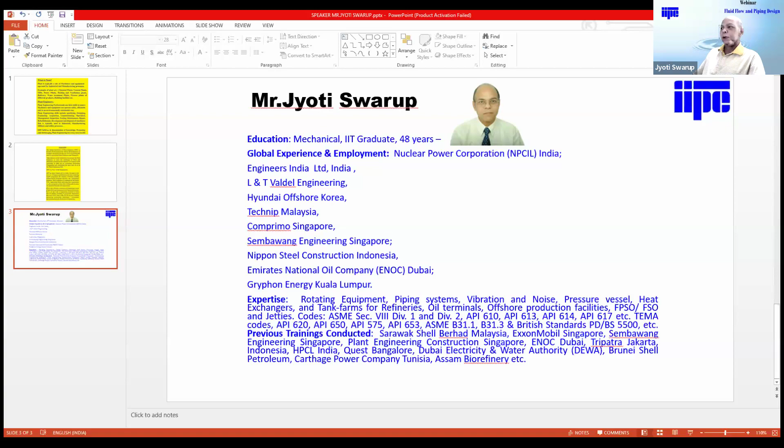Thank you so much for the introduction. I have been conducting trainings from the time when there were no computer projectors. I was conducting training 40 years back, when there were only overhead slides, and we used to write on the slides and project it using a projector. This training on piping design, it's almost 30 years that I have been doing various trainings in various forums. I thank IIPE for inviting me for this presentation.

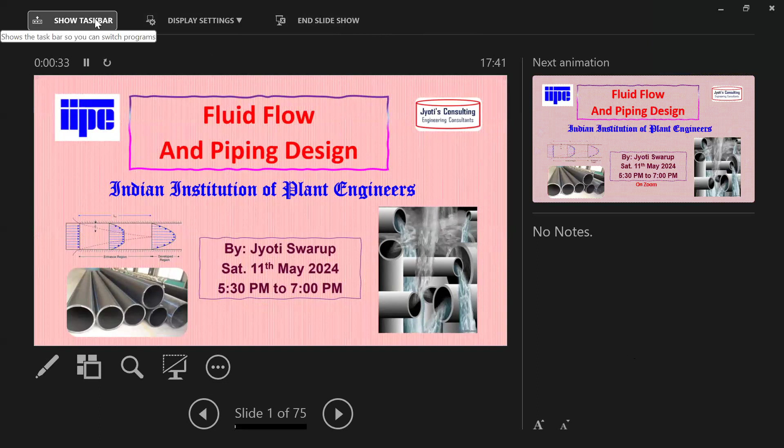Now, let me just share my PPT. Give me just one minute here. Is it visible now? You have to make it full screen, sir. Oh yes, one minute, I'll do it. Is it correct one? You are seeing single screen, right? Yes, screen is okay, but you have to make it full screen. Oh, I made it full screen, that's what I'm trying to say. You don't see it full screen? You are seeing one or two screens? Two screens we are seeing. Okay, I have to change it. Give me a minute, I understand, I have to just change.

I am Jyoti Swarup, and we are going to talk about fluid flow piping design today.

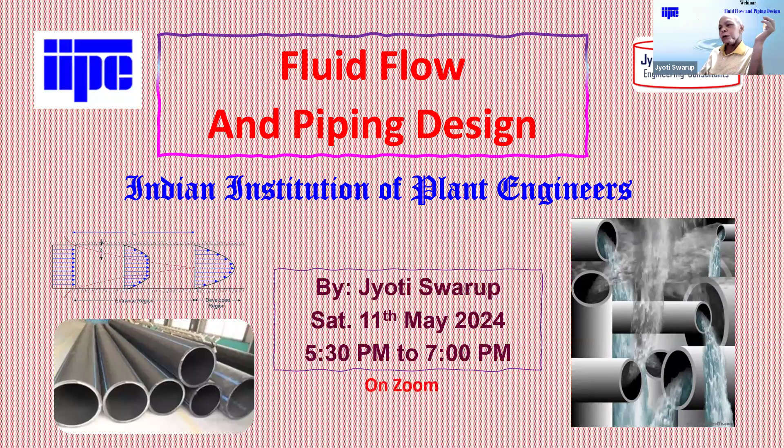To talk about fluid flow: we all know fluid flowing from rivers, from canals, and of course in refineries, in petrochemicals, in water supplies. So the objective of this whole presentation is to calculate and select appropriate pipe diameter and thickness, connection to equipment based on codes such as B31.3 or B31.1.

I have also given a reference if some of you don't have these codes, on how you can download from the net. Piping materials to be selected to determine the pump discharge pressure for sizing the pump, which means calculating the line pressure drop. In piping layout, what is suggested pipe support spacing and how to calculate it, and a simplified flexibility analysis, which means the effect of thermal expansion on pipes as per the codes.

This is how a typical diagram will look like. You have a water source maybe below the ground, then you have a pump, a prime mover, and a water lifting device which is pumping it say one kilometer away to a building or to a storage tank 25 meters high. So we need to find out the pipe material, size, capacity, layout, and how we do all that. This is the objective of this presentation for today.

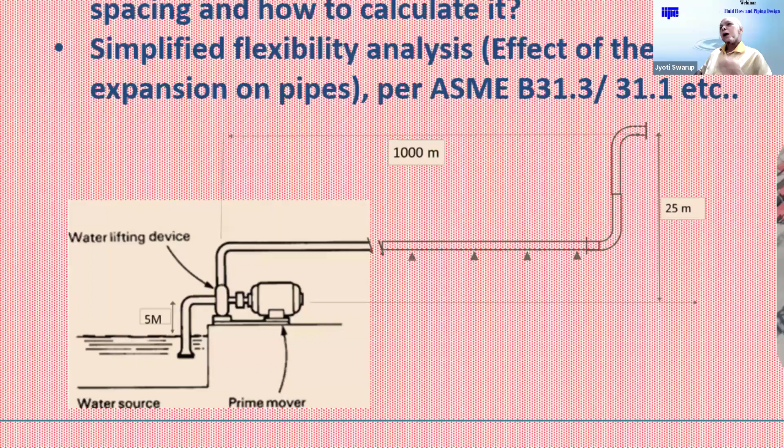We will talk about piping. We all have seen piping in our life: water supply from waterworks to our home, drain piping from home, irrigation pipes in farms, cooling water in buildings, firewater piping, and pipes used to carry pressurized heating fluids, steam engines, etc. In a process plant, the process piping system accounts for a significant portion of plant cost, as high as 20 to 25%. So piping is a very important component of a process plant and needs to be understood and sized most economically. The most important item of engineering is optimization, that is, you can't select it over what is required or under what is required. So the most optimum size and details of a piping system, from a water tank to a building, or a process plant to an equipment, this is the objective of this presentation for today.

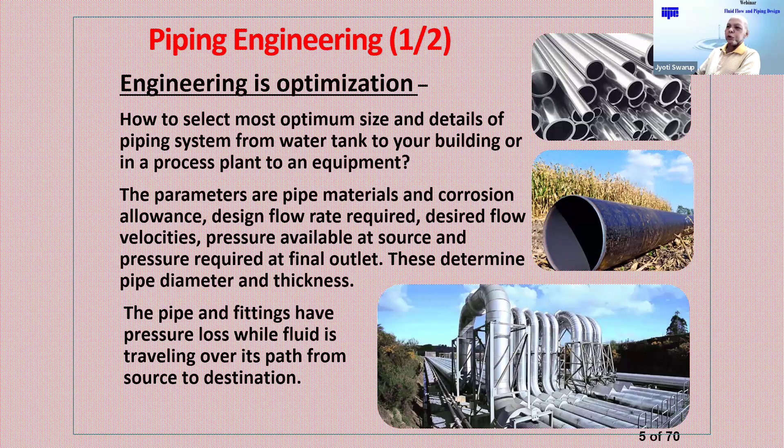So parameters are pipe materials and corrosion allowance, design flow rate required, desired flow velocities, pressure available at source and pressure required at final outlet. They determine pipe diameter and thicknesses. And pipe fittings have pressure losses wherein fluid is traveling over its path from source to destination.

The responsibility of a piping engineer includes design and layout, piping flexibility analysis and support system design, pipe rupture restraints and jet shield design, more applicable to process plants, piping around equipment, producing piping bill of material, isometrics, etc., and coordination of piping fabrication contract and interface with other disciplines. So this is the scope of the piping engineer.

What are the sizes available? Of course, most of you will know the sizes available in the market. But just to summarize, there are standardized pipe dimensions defined by OD and thickness or by schedules. They are available in the market. You can only install a pipe that is available in the market. You are not going to order a tailor-made pipe unless you have 1,000 kilometers of pipe to be installed. So nobody will make it for you.

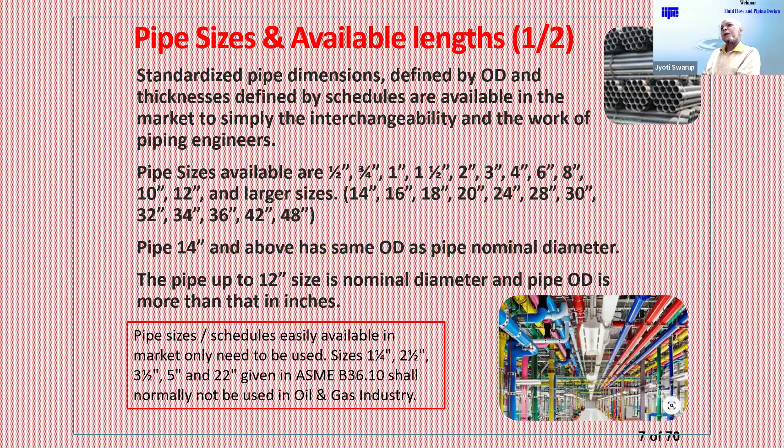For plants, you have standard sizes available, from half inch to 12 inch, defined based on the nominal size, where the OD is more than the nominal size. Larger sizes, 14 inch to 48 inch or 60 inch, are defined by the OD itself. So there are two ways of defining the pipes: up to 12 inches is one method, more than 12 inches is another method. These are supplied in random lengths of 17 to 25 feet or double random length of 38 to 48 feet.

Nominal pipe size is a dimensionless designation of pipe sizes. Diameter nominal is in metric units. So NPS is in FPS units, DN in metric units. NPS 2 inch OD is 2.375 inches, not 2 inches OD. DN50 is the same as NPS 2 inch.

Joining methods include butt welding, socket welding, screwed, bolted flange, quick coupling, etc. So if you see this piping, in smaller sizes it's a nominal pipe diameter and OD is more than NPS. 14 inch and above is NPS, and the OD is the same. So these definitions have to be understood correctly.

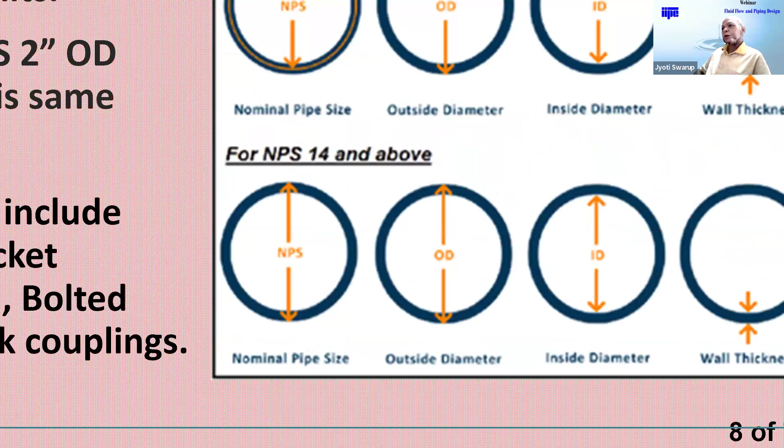What are the thicknesses available in the market? Now there are three different methods of defining the thicknesses. Schedule 10, 20, 30, 40, 50, etc. - this is called ANSI schedule numbers, which defines thicknesses. Also for stainless steel: 5S, 10S, 20S, 40S, and 80S. Similarly, the other definition is ASTM or ASME standard, extra strong or double extra strong. The third method is API 5L, which defines thicknesses. So these are the different methods of defining pipe thicknesses available in the market.

The pipes can be seamless, from piercing solid billets with no welding, or welded type from plate - roll the plate and weld it, either straight seam or spiral welded. Pipe ends are either plain end, beveled ends, or threaded and coupled. Now, pipe thicknesses usually have a mill tolerance allowed as per code.

For carbon steel pipes, it is typically plus minus 12.5%. So if you say a pipe is half inch thick, it does not mean it is exactly half inch thick. It can be half inch plus or minus 12.5%, because of manufacturing tolerances. So some pipe schedules like Schedule 100 may not be easily available, so you need to use the next higher schedule wherever there is a requirement.

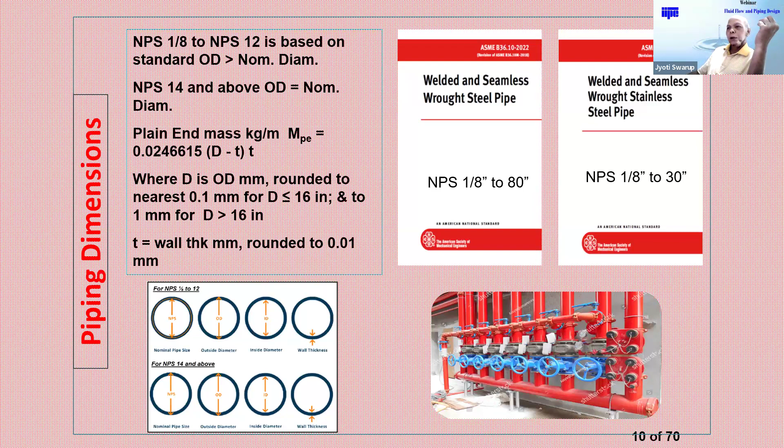And weights can be calculated based on the formula given here in this slide. It's just calculating the section area multiplied by the density, which gives you the weight per unit meter.

Now, these kinds of tables are available in the codes, which give you the pipe schedule, thicknesses, and other parameters that can also be calculated. For example, in Shell DEP or any piping codes, you will find not only the diameter and thickness schedule number, but also inside diameter, outside diameter, metal area, outside area, etc.

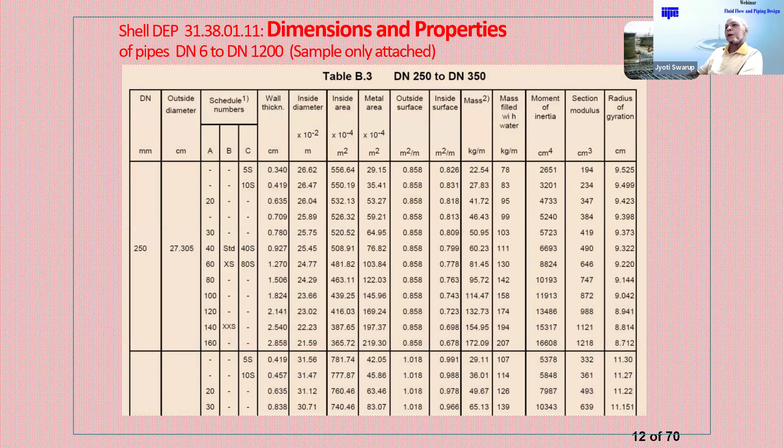So a lot of these parameters can be utilized when we need to use them, and we can use those parameters to define many things like inside surface, mass filled with water, moment of inertia, section modulus, radius of gyration, etc. So now properties can be seen from the table or can be calculated from the formula.

Now pipe connections are using flanges. Typically, if there is a removable connection, it's a flange. If it is welding, then it's not a removable connection.

Flange ratings are defined as 150 pound, 300, 600, 900, 1500, and 2500, based on increasing pressure. For a typical carbon steel material, 150 pound rating is actually 285 psi design pressure, not 150 psi. Many people think a 150 pound flange means 150 psi, which is not correct. The 2500 pound flange rating is 6170 psi design pressure at ambient temperature.

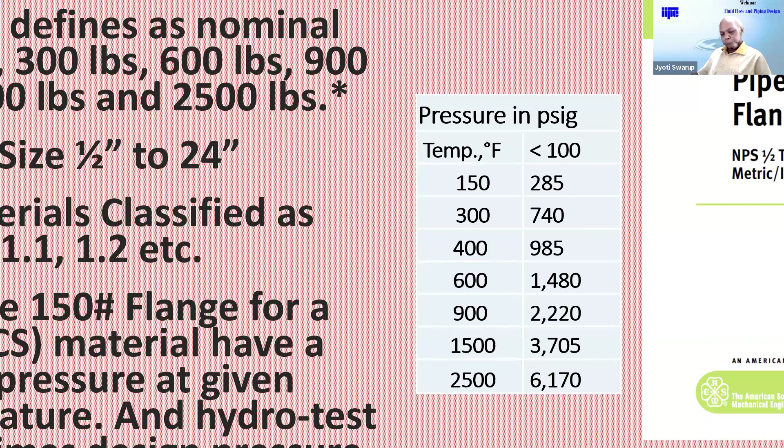This is defined by a code called ASME B16.5. The dimensions, size, and ratings are defined in this code, and it is always required by the piping engineer to define flange characteristics and buy flanges according to the codes. Materials have been classified in this code as 1.1, 1.2, and so on. Carbon steel is 1.1, and for a given carbon steel material, the design pressure at a given temperature and hydro test is 1.5 times design pressure. This information is to be referenced from code 16.5 for the flanges.

Similar information is also available in the valve code, B16.34. It also has another class called 4500, which is not a flange rating but is only applicable for valves. Many people confuse this, thinking there is a flange rating of 4500 pound also, but that is not the case. That is for welded pipes.

A lot of such information could be more useful if you actually try the exercises shared in the email. Now, larger flanges are defined by different categories and codes.

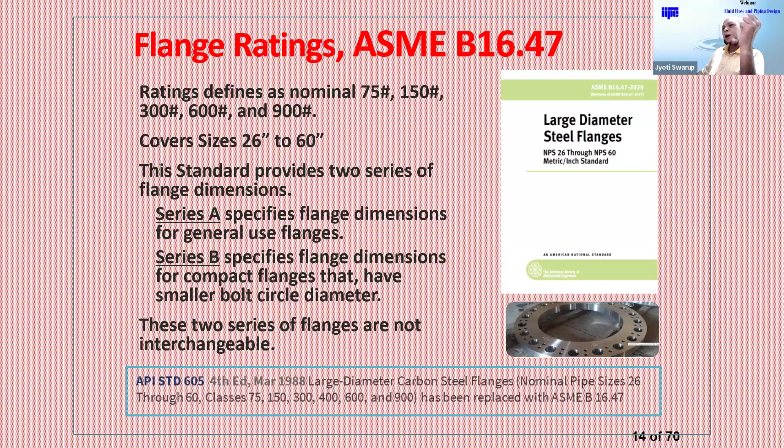Fittings are definitely required to route the piping because it's never straight. Piping can bend, going up, down, left, right, and therefore all kinds of fittings are available in the market - bends, tees, couplings, reducers, and so on and so forth.

All these fittings' dimensions and details are also available in various codes and also on some apps available on mobile. We will give you some description of these apps as we go along.

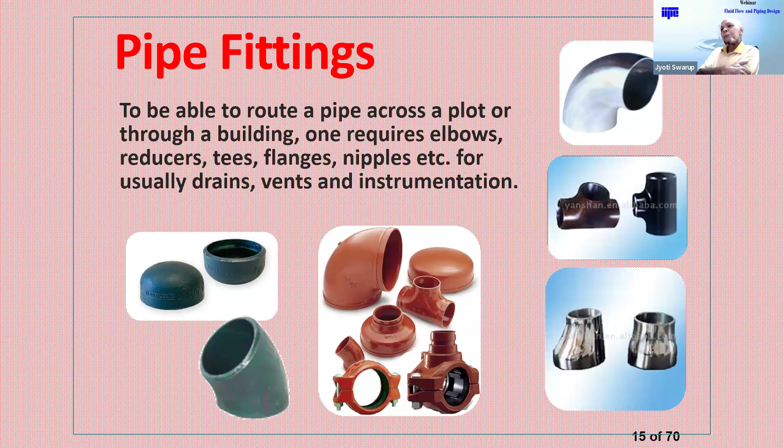Pipe flanges can be defined as various types - welding neck type, as shown in this figure. There is a slip-on type, where you just slip it onto the pipe and weld it. There is a blind flange, which is a closure. There is a socket welded flange at the end of the pipe, a threaded flange, and a lap joint flange. So different types of flanges are available.

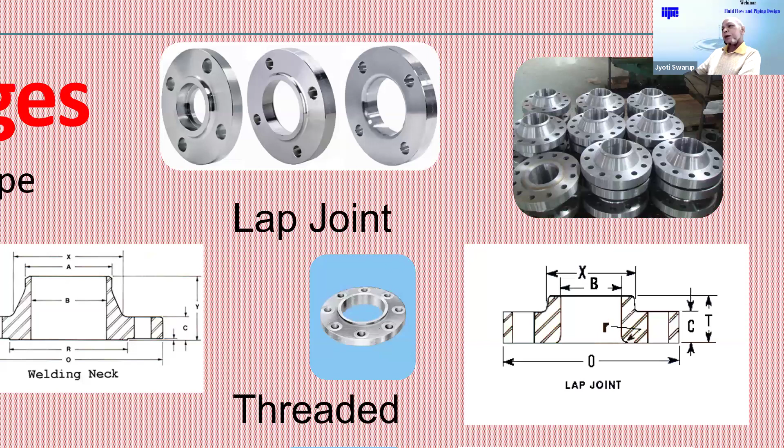For oil and gas industries, most of the time we use weld neck flange, which is the sturdiest design of these flanges. But any of these can be used depending on the application. For example, in water applications, mostly we use lap jointed flanges.

Material selection depends on type of service, compatibility with other materials, mechanical strength, ductility, elasticity, toughness, need for special inspections, test or quality control, possible misapplication in the field, and corrosion and erosion caused by internal fluids or marine environment.

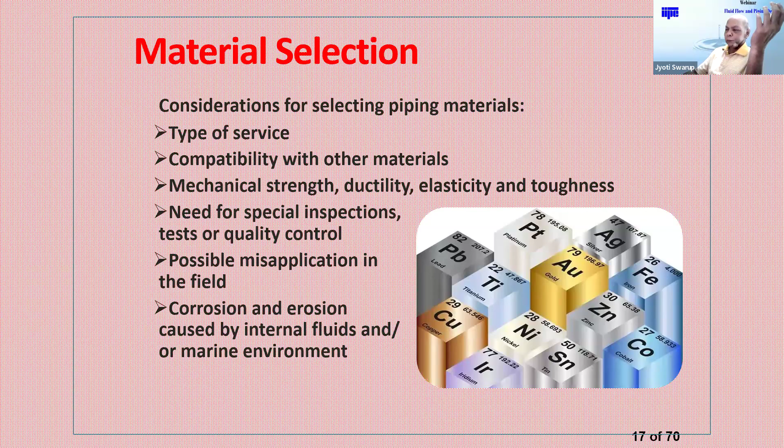There are various types of material that we can select, and some material codes available in the American codes are A53 for pipe, A106 for seamless pipes, and so on. For fittings and flanges, etc., there are a lot of materials available in the ASTM or ASME codes, and some of these are only listed here.

For pipes, we already discussed ASME B36.10 for carbon steel pipe and B36.19 for stainless steel pipe. API 5L is another code for line pipes - pipelines such as cross-country pipelines or long pipelines, wherein API 5L code is used for pipelines with a given thickness.

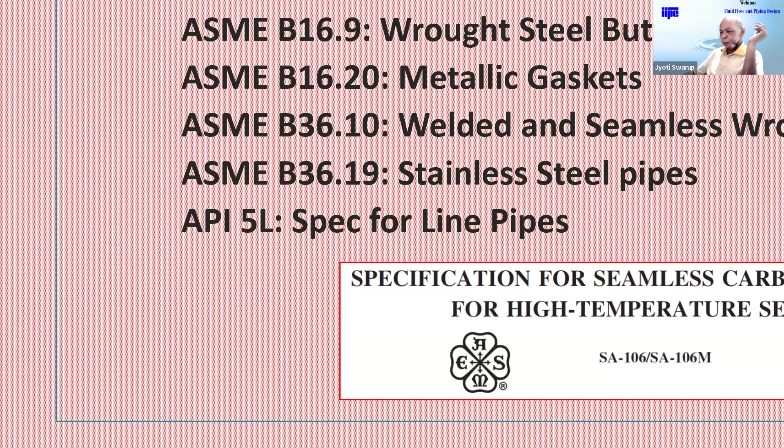The common material grades available and their minimum yield strength and tensile strength are given in the table below. As you can see here, API 5L grade A has yield strength 30,000 psi, ultimate tensile strength 48,000 psi, and so on. So 5L grade B is 35,000.

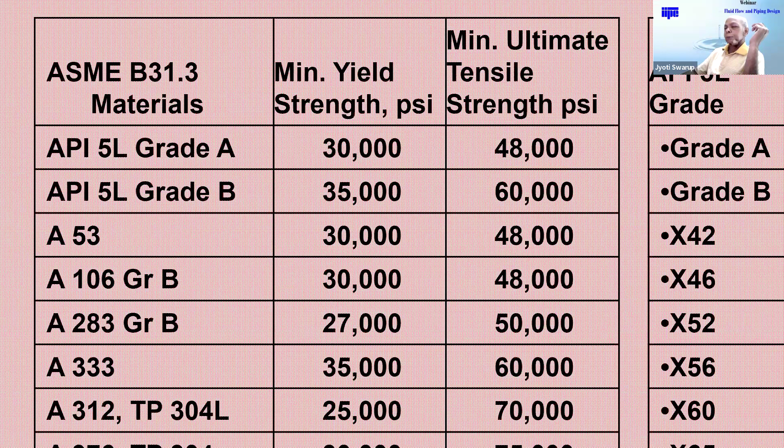Now why am I listing this information here? Because this will tell you the strengths of the pipe when you want to calculate pipe thicknesses. This information will be required for us. Things like duplex stainless steel 31803, etc., are always available with high yield strength and tensile strength, and can be used to reduce the thickness of the pipe if there is a critical application.

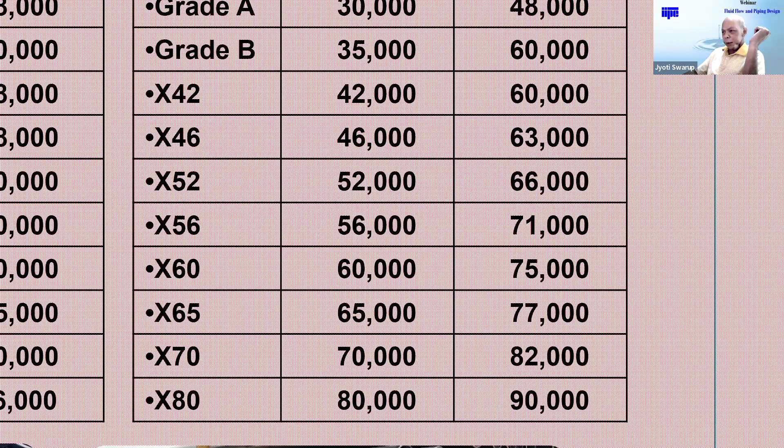The other code we mentioned was API 5L, which gives the thicknesses, and it does not give it directly—it says X42 grade means 42,000 is the yield strength of the material. So we have X80 grade, which has a yield strength of 80,000 psi for the carbon. These are all carbon steel pipes, not stainless steel.

So for pipelines or critical applications, we use API grade 60 or grade 65 instead of using a piping grade, which is API 5L grade B or A106. So for pipelines we always use API 5L pipes, while for piping we use ASME A106 or whatever pipe grade we have. Pipelines can be high strength material ordered to the spec of the client, and of course ordered in bulk sizes. This actual grade may not be available in the market.

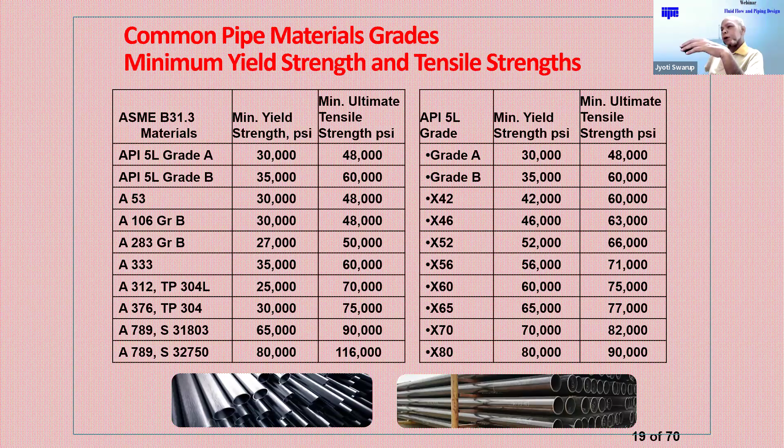Now, stainless steel is used in many critical applications like pharmaceutical or chemical applications wherein we use 18-8 quality, used in the chemical industry to manufacture equipment for processes. 316L is used in cases where metal is deformed or subjected to thermal loads over extended periods, where there is heating to a temperature between 500 and 900 degrees centigrade.

So different criteria exist for material selection, and each material is selected accordingly. Coming back to what we said, engineering is optimization. We cannot select a material which is more expensive than required, because the plant will become unviable. So it is always good to select the most optimum material, and we will select stainless steel only if it is really required, not just because I feel like selecting stainless steel or duplex stainless steel.

The choice is always to go with carbon steel welded pipe, number one. Second is carbon steel seamless pipe, number two. Then comes any other material like copper, brass, bronze, or whatever we have—stainless steel, duplex stainless steel, or nickel. But the cost keeps increasing with these materials, and we should only select them if it is really required for the project.

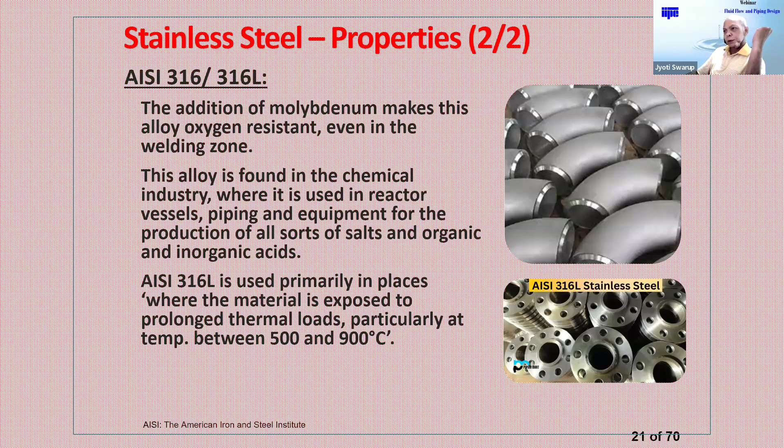So there are different criteria for material selection, but as I said, it is always the lowest cost material which needs to be selected to optimize the project cost, and not select a size or material which is more or less than required.

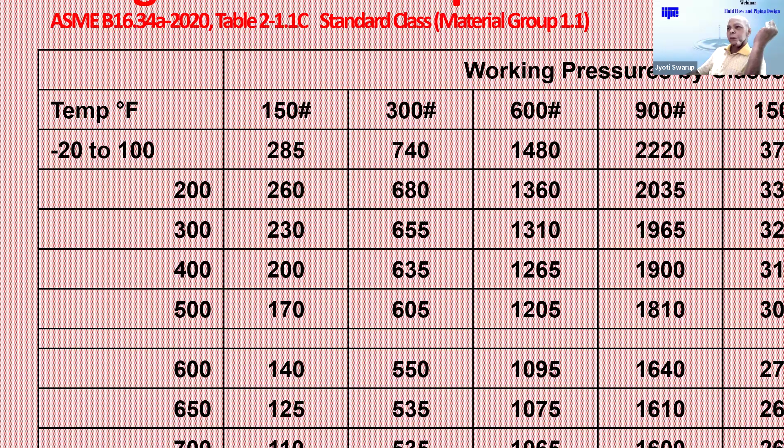Now this is a typical table from ASME B16.5. I've just copied one of the tables, number 2-1.1C, which is the same as in B16.34 and B16.5. So for 150 pound line rating, temperature minus 20 to 100 degrees F, the working pressure is 285 psi; 300 pounds is 740 psi; 600 pounds is 1480; 900 pounds, and so on. As I said, 4500 is not for plant, the rest is for plant, copied from B16.5.

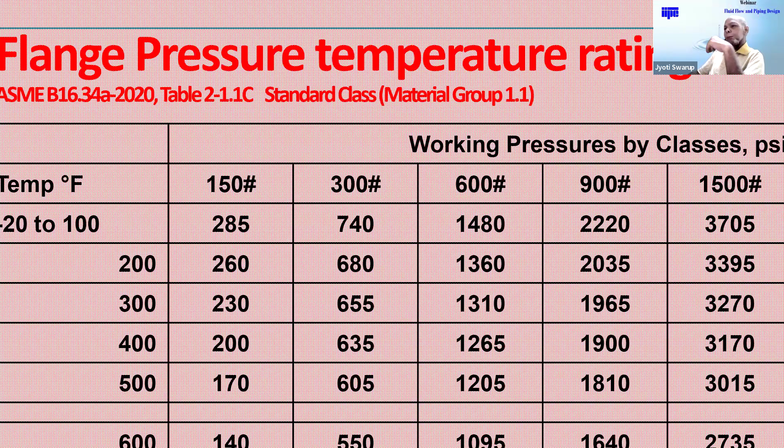So these are the pressure ratings for a given temperature of these flange ratings, and that is why, depending on the design pressure of the piping system, you select an appropriate flange for the next higher pressure rating to which the piping system is designed. This code, B16.5 or B16.34, is important for selecting the flange at the appropriate rating and size, and depending on the design temperature you are designing the whole system for, you have to select the appropriate flange for the maximum pressure rating, higher than that to which your system is designed.

Any of these apps can be easily downloaded. There are both free versions and paid versions. Free versions are good enough, with a little bit of ads which come, which you have to tolerate.

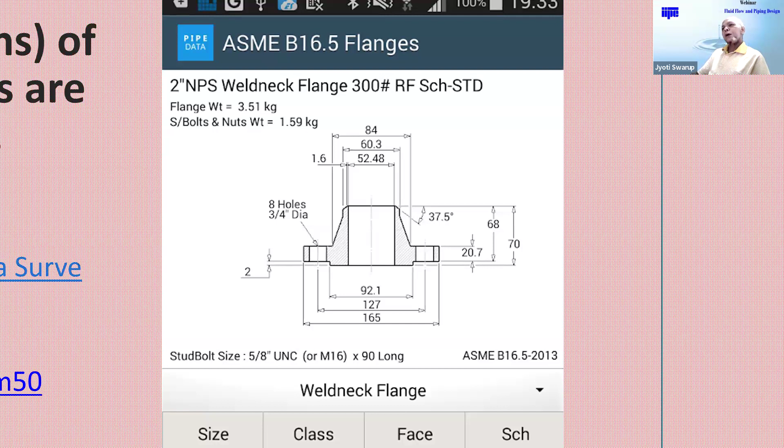So it gives you all the details. Let's say this app is from pipe data. It says for a 300 pound weld neck flange, rating schedule standard, weight 3.51 kg, bolt weight 1.5, dimensions are marked there, and so on. So all such information is readily available on your mobile, and for the exercise I shared, you can use it from the mobile or from the code itself. Both options are available to work on.

Now coming back to fluid flow, the other topic. Some of you will remember from engineering classes an equation called Bernoulli's theorem of fluid flow. I think we didn't like this when we were studying engineering, but this is the fundamental equation for fluid flow into the piping system that we need to use for calculating pressure drops and flow velocities for the piping system.

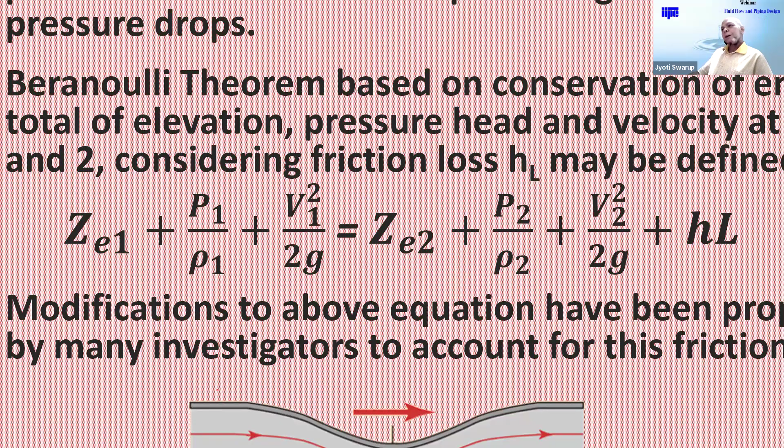Bernoulli's theorem is based on conservation of energy as total of elevation, pressure head, and velocity at point 1 and 2, considering friction loss, defined as Z1 plus P1 by rho1 plus V1 squared by 2G is equal to Z2 plus P2 by rho2 plus V2 squared by 2G plus the head loss for the system. So this is the basic equation utilized for calculating the pressure loss. HL is the pressure loss for the piping system. As long as you can find the elevation of the pipe, the pressure, the density of the liquid, and velocity at the two points, you can calculate the head loss. This is the basic equation.

So Z is elevation, P is pressure, rho is density, V is velocity, G is 32 feet per second squared, and HL is the friction loss. This is the basic equation utilized for calculation of piping pressure loss.

Now, properties of the pipe will be required for calculation of pressure drop, and a thing called Reynolds number will be one of the important criteria, which we will define in the next slide. Viscosity is the most important criteria for calculating Reynolds number. It is the resistance of the fluid to flow when acted upon by an external force, and it is temperature dependent.

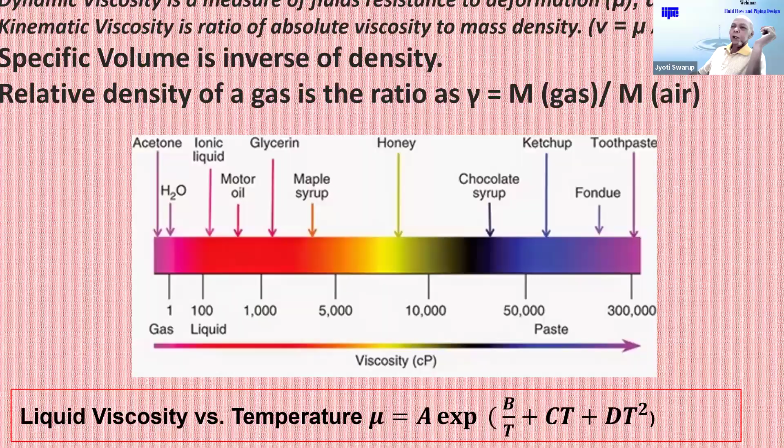If you look at this viscosity chart, acetone has very low viscosity, while toothpaste doesn't flow at all. Ketchup, chocolate syrup, honey, maple syrup, glycerin, motor oil, ionic liquid - these all have different viscosities. Toothpaste has a viscosity around 300,000 centipoise, while acetone could be around 0.8. So it's a logarithmic range of viscosity, from very viscous fluids to very fluid substances.

This viscosity is an important criteria for calculating the Reynolds number and ultimately the pipe pressure drop. Viscosity depends on temperature, and as temperature increases, viscosity decreases. This is a typical formula utilized, a square equation, for calculating viscosity with temperature. These A, B, C parameters can be seen in tables available in various publications.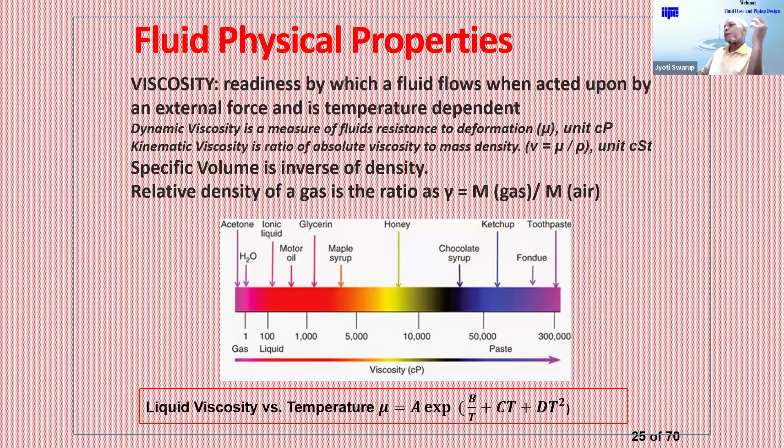Now, a typical Reynolds number is defined as a non-dimensional parameter: diameter into velocity into density, divided by viscosity. So d V rho over mu.

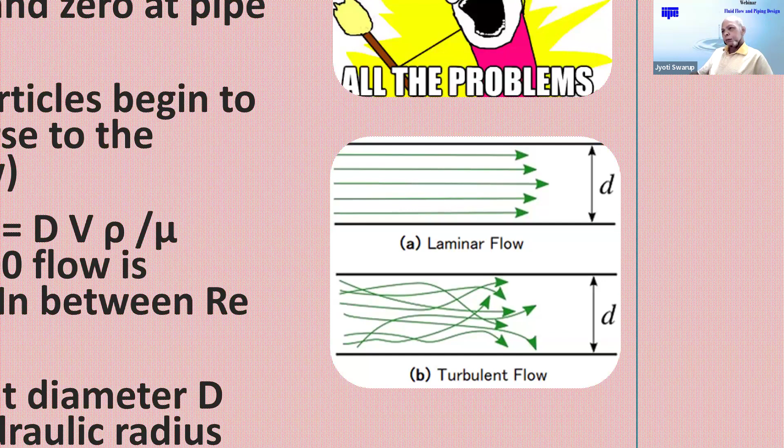At low velocity, the velocity of fluid at the center of the pipe is maximum and zero at the pipe wall - this is called laminar flow, as shown in the diagram. At higher velocities it's turbulent flow, which isn't such a smooth flow. So you have two things: laminar flow, with a Reynolds number less than 2000, and turbulent flow, with a Reynolds number more than 4000. These are the definitions of laminar and turbulent flow versus Reynolds number. Depending on laminar or turbulent flow, the pressure drop into a pipe is defined by two different methods.

Now, what is hydraulic radius? Hydraulic radius is just a way of defining the diameter of a pipe which is non-circular. It's the area of flowing fluid divided by the wetted perimeter - this is called hydraulic radius, and this is what you use in calculations of pressure drop in pipes which are non-cylindrical. This is just information, but details can always be seen in the publication.

Now, flow velocity limits. Typically, we use 5 meters per second as the velocity limit. It's just an arbitrary limit - somebody may ask why not 5.5 or 6, but the industry normally uses 5 meters per second for liquid at maximum flow rate to minimize flashing ahead of a control valve. Also, velocity should not be less than 1 meter per second to minimize deposition of sand and other solids.

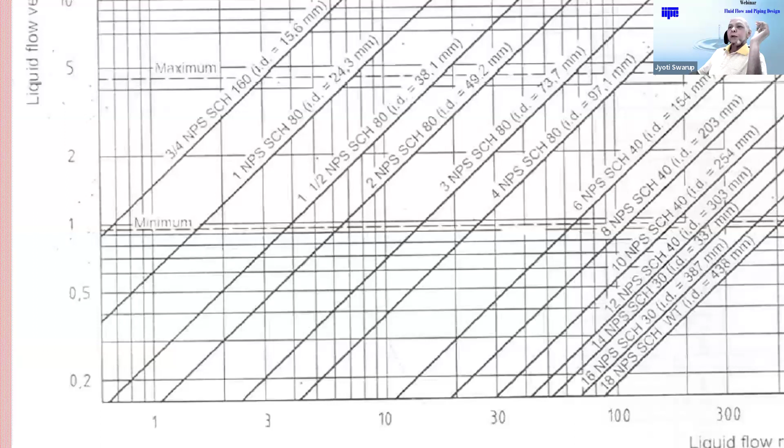Now, this kind of curve is available, wherein the liquid flow rate in meter cube per hour and liquid flow velocity can be calculated from this chart, given the pipe size.

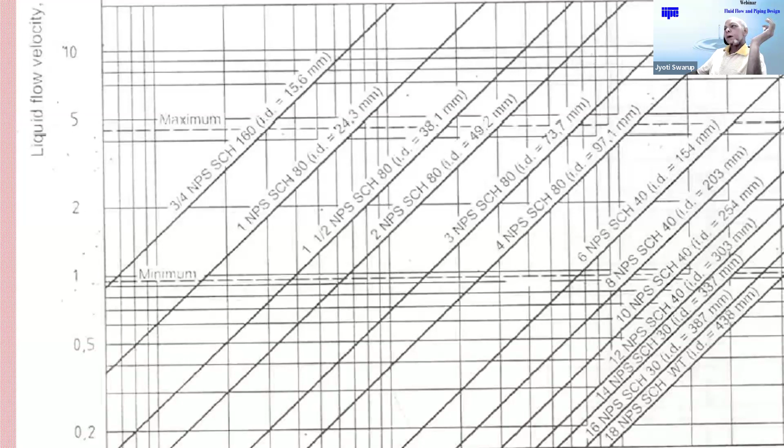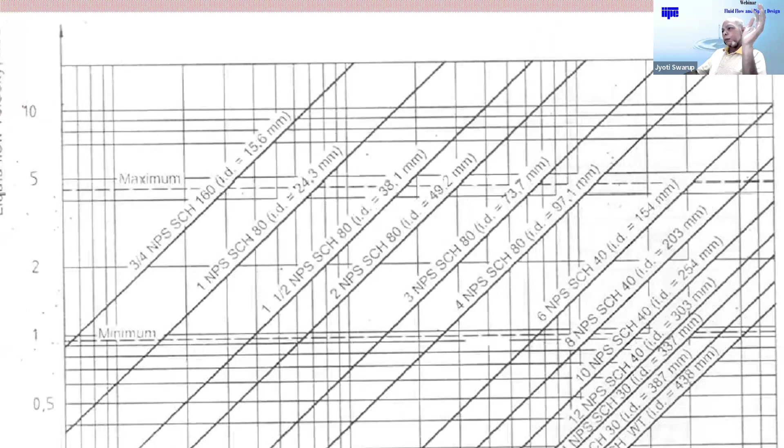So, let's say a 2-inch schedule 80 pipe for 30 cubic meters per hour gives a velocity of around 5 meters per second. If you want to limit the velocity to around 5 meters per second, you can look at the flow rate, check this chart, and connect it to a pipe size directly. So if I have a 300 cubic meter per hour flow from this chart and want to limit myself to 5 meters per second, I'll have to go with a 6-inch schedule 40 pipe, which gives a velocity less than 5 meters. If I go with a 4-inch pipe, it will give a velocity more than 5 meters, 11-12 meters per second, which is not good. So I have to go either 6-inch, 8-inch, 10-inch, or 12-inch if I want to limit myself to 5 meters per second.

So I will start with 6 inches. If 6 inches does not satisfy my requirement, I will go with the next higher size. This is the initial sizing of the pipe that we start with, and then we look at the other details of pipe sizing.

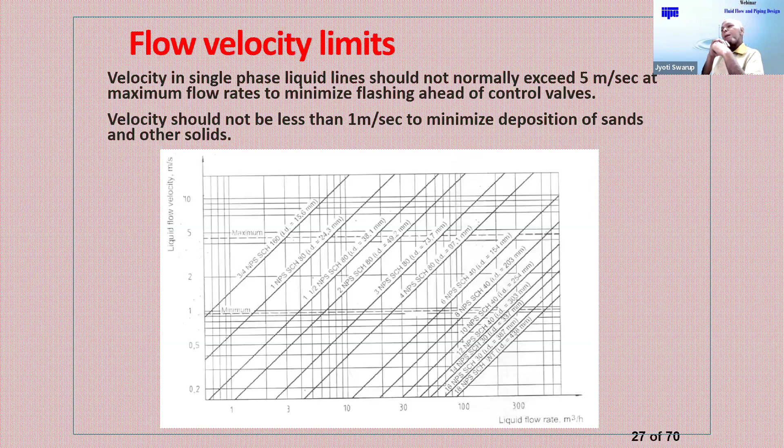Now, for calculation of Reynolds number, I have given some examples here. Many times people make mistakes in units - the viscosity unit has to be dynamic viscosity or kinematic viscosity, and the definitions are different, so the calculation has to correctly use the right unit, as shown in the example. I have given calculations in both FPS and CGS units. So if you want to work out your Reynolds number in the exercise we shared, look at the correct units and make sure you get the right numbers. You can use these examples as reference for your calculation.

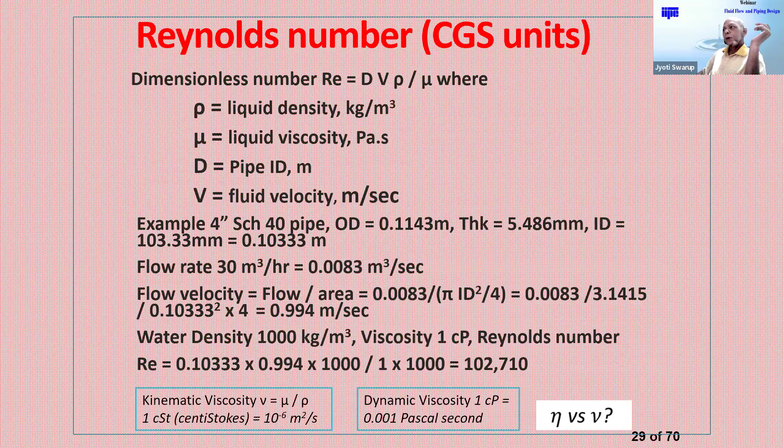Now, pipe friction is always there, and the friction is defined by a coefficient called F. The head loss in the pipe can be defined as F times L by D into V square by 2G. So HL is the frictional resistance in the pipe, F is the friction coefficient, L is the length of pipe, D is the diameter of pipe, V is the velocity squared, G is the acceleration due to gravity. It's a very simple formula - calculating the friction loss in a pipe depends on the length, velocity, diameter, and friction coefficient.

Now, the friction coefficient has been defined by the Colebrook formula, which looks something like this - a very ancient formula. 1 over square root of F is equal to minus 2 log of epsilon over 3.7D plus 2.51 by Reynolds number times square root of F. So this friction factor F depends on F itself, requiring an iterative calculation using this formula. This iterative calculation can be easily programmed into Excel. Nowadays there are other formulas that can be used instead of this Colebrook formula with its iterative solution, but earlier we used only this formula for calculating friction factor. This is valid for Reynolds number greater than 4000. For Reynolds number less than 2000, friction factor is simply 64 divided by Reynolds number, where epsilon is the surface roughness parameter, which may be typically given in the next sheet.

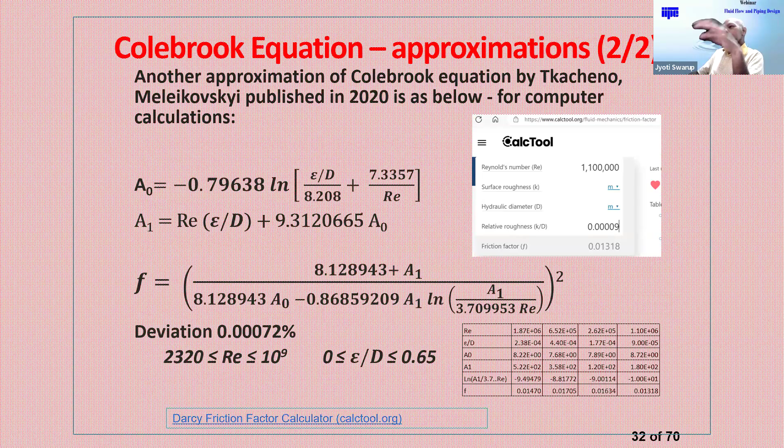Now, typical roughness of pipe material - in a plastic pipe it is very smooth. In a steel pipe, it is about 46 micrometers.

Asphalt-dipped cast iron pipe, 122, galvanized iron, 152. This information is used in calculation of the friction factor, using the roughness of the pipe material. This is a small table available for use in our computer modeling of the friction factor calculation.

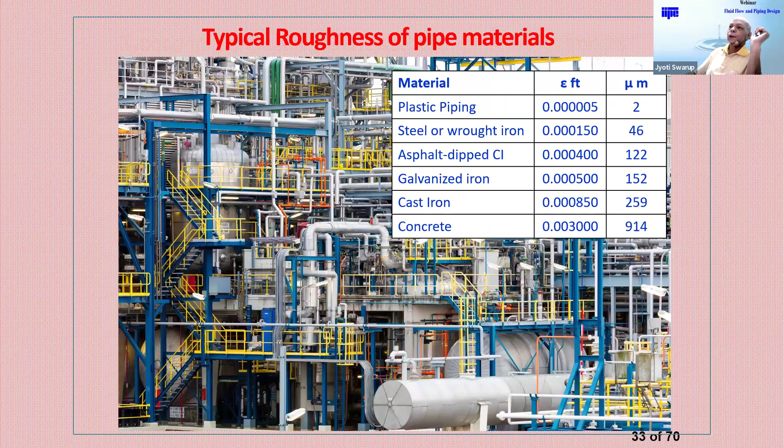This is an example I have worked out here. Let us say a 1 kilometer pipeline, 180 meter cube per hour, 200 millimeter diameter pipe. If I take roughness 0.12 millimeter for an asphalt pipe, or 0.05 millimeter for a commercial steel pipe, velocity 1.59 or 2 meter per second, ratio E by D so much, Reynolds number so much, and Moody friction factor calculated or taken from the chart, you calculate friction loss in meter of H2O as 11.62 or 5.5.

As you can see, for an asphalt pipe, which has very high roughness, the pressure loss is almost double that of a commercial steel pipe. If you use an HDPE pipe, it will be still lower pressure drop. So pressure drop depends on the pipe roughness, which is an important criteria. Commercial steel pipe or stainless steel pipe will have relatively lesser pressure loss compared to a cement pipe or asphalt pipe, which is almost twice. I have given this calculation method here, which can be utilized as a reference when you do this calculation for the example.

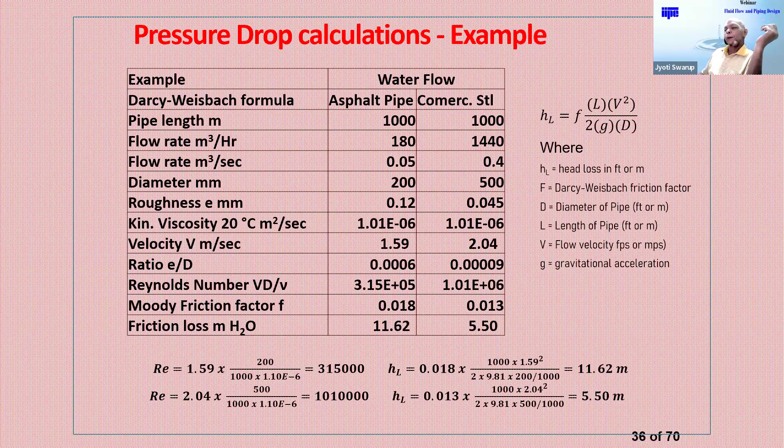So as you can see, the flow velocity is on the higher side. We limit it to 5 meter per second. If it is high side, the pressure drop is very high.

Now, this kind of calculators are also available online, and I have given one of them here, which can be utilized for calculating the pressure drop. Of course, there are many others available on the net, but you can use whichever is more convenient to you, and recheck your manual calculation using this kind of calculator.

Of course, these calculators have their own limitations. Not every calculator gives details of each pipe and fitting. So understanding the requirement of the pressure drop calculation is a must before you can use the calculator. Please do not go to the calculator directly without doing a manual calculation. My suggestion is don't use a calculator to start with. Use a calculator only when you understand how the pressure drop is calculated.

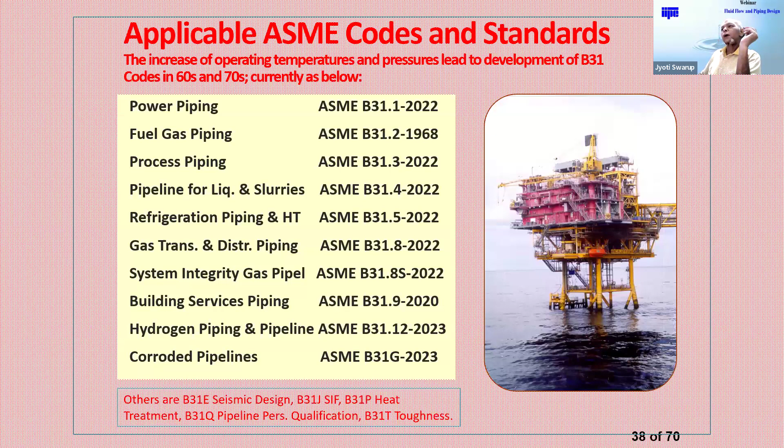Now today we are going to talk about 31.3, which is the most common code utilized in most of the industry, and probably the basic code that is well known all over.

So this is the most common code, 31.3, and that is why I will be discussing this code as we proceed further into the presentation.

Now 31.3 table of contents I have given here, which includes design, material, inspection for both metal and non-metallic piping, high pressure piping, high purity piping, etc. And then there are a lot of subsections, which constitute different types of pipes and give you details of each type.

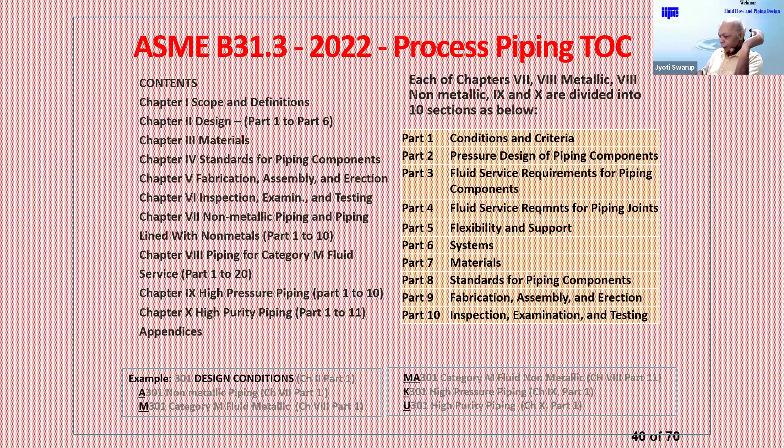So this is almost a 500-page document, and you have to look at which section is applicable to your project. Nobody can probably memorize 500 pages, but there are specific pages available for your industry or your pressure drop or temperature that you have, and accordingly you select the code and the appendices that you have.

So the typical requirements of this code, I'm just giving here very briefly. The code is a very large code, but just a few definitions: fluid service, a general term concerning application of a piping system, considering the combination of fluid properties, operating conditions, and other factors that establish the basis for design. Category D fluid service is non-flammable, non-toxic, non-damaging to human tissues, design pressure less than 150 psi, temperature less than 186 degrees. Category M fluid is highly toxic, covered in chapter 8 of the code.

Elevated temperature fluid service is metal temperature more than the critical metal temperature of the metal, 25 degrees C below identifying the start of time-dependent properties; that's Annex M. High pressure fluid service again has a separate section. High purity fluid service or ultra high purity fluid service, like hygienic or pharmaceutical, can use this section, and the normal fluid section is the rest of the code.

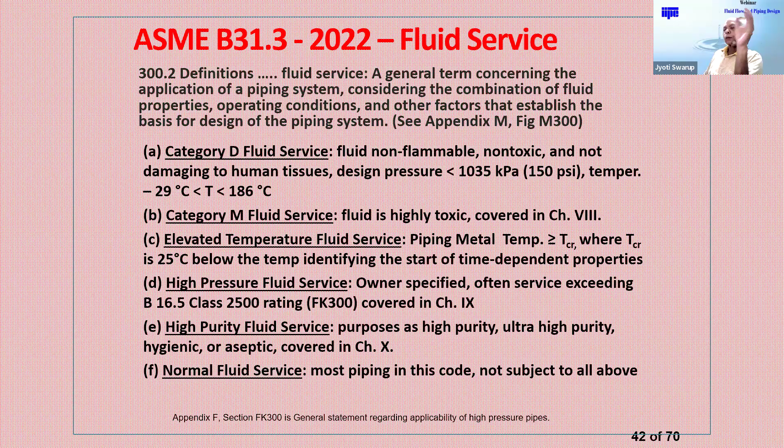So this code is divided into various categories of fluids, and the correct clause has to be utilized for your industry, whichever you work in.

Now, for category D fluid service, carbon steel pipe may be used, such as API 5L pipe, A53 type of pipe, or A134 pipe. Slip-on flanges can also be used for category D fluids. As I told you, in oil and gas we mostly use weld neck flanges and not slip-on flanges.

So some of these clauses, one I picked up was called cold spring. Now what is cold spring? Cold spring is if the temperatures are higher of a particular piping, the pipe will thermally expand and the supports will be unnecessarily loaded with the expansion thermal stresses of the pipe. And those supports have to be designed for an excessive load.

So cold spring, what we do is while installing the pipe, we pull it to 50% of the maximum expectation of the thermal expansion and then leave it pulled like this. So in cold situation, the pipe will remain under tension. In hot situation, the pipe will remain under compression, but the stresses will be much lower. So this is what we call cold spring.

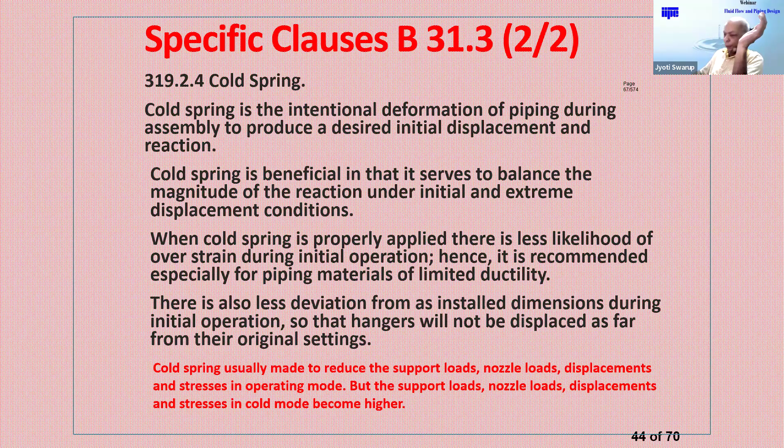Cold spring is made to reduce the support load, nozzle loads, displacements and stresses in operating mode. But support loads, nozzle loads, displacement and stresses in cold mode become higher. So at ambient temperature the pipe is stressed, but the hot pipe is less stressed.

Like this, there are many clauses in the API which can be utilized depending on your case to case basis. For example, a water piping case: a 25-meter high storage tank, water pressure at ground level shall be approximately 2.5 bar. 25 meter is equal to 2.5 bar. Assume carbon steel piping, say 4-inch diameter, over a length of 1000 meter with many elbows, valves, strainers, will require a pressure loss of about 1.1 bar for a flow rate of 30 meter cube per hour. Final pressure available is 1.4 bar at ground level.

4-inch pipe will have many outlets to various flats in a building, and pipes can be 1 inch or half inch. At the second floor, say 7 meter above ground level, the pressure available will be less than 0.7. So this is how to do further piping sizing and piping pressure drop calculations as we proceed with the piping from the larger side to the final destination, like say in a building.

The pipe is distributed all over the flats, or all over the colony, or all over the city, and pipe sizing can be different depending on how much load we are allocating to each of these sections, and accordingly the pressure drop will be decided for each section of the pipe.

Now, pressure design of piping components requires allowance for pressure and temperature variation, and we have to design for the worst case scenario. The most severe coincident pressure and temperature will determine the design conditions for calculating the thickness of the piping component. Straight pipe thickness can be calculated using the formula given in the next section.

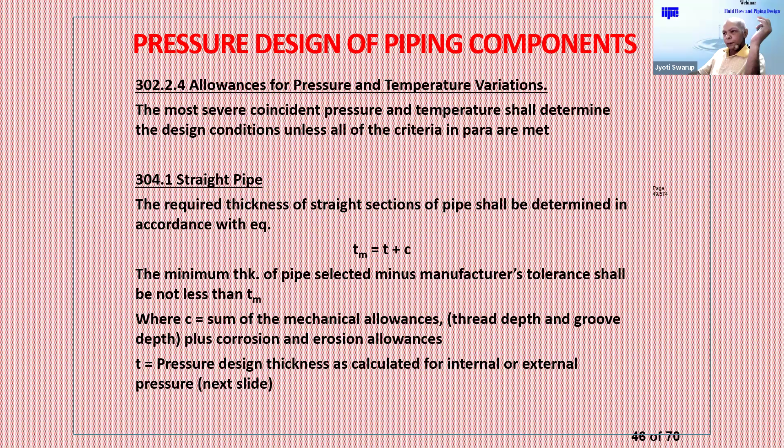Then we have to add a corrosion allowance to it, which is based on the life of the plant and expected corrosion. C can be the sum of mechanical allowances like thread depth, groove depth, plus corrosion and erosion allowance. And T is the pressure design thickness as calculated from the formula in the next slide.

Internal pressure for straight pipe from code, clause 304.1.2: for thickness less than D by 6, t equals PD by 2 times (SEW plus PY) is the formula for calculating the pipe design thickness. P is the internal design pressure, D is the outside diameter of the pipe, S is allowable stress based on yield strength and tensile strength, E is the longitudinal weld joint factor. If it's a welded pipe versus a seamless pipe, E is 1. W is the weld joint strength reduction factor for higher temperature, more than 510 degrees. Y is a coefficient for ferritic steel, 0.4, and different materials have different Y coefficients, so you can look at the code accordingly.

This calculation is very easy. You have all these numbers and you can calculate the thickness for a given diameter and a given pressure of a pipe. My suggestion is try the exercise, I'm repeating it again and again. Try that exercise, you will get a real feel of these numbers and how they are calculated.

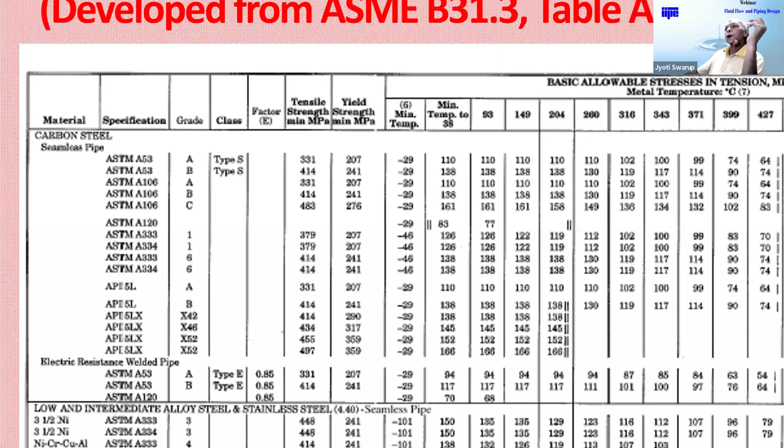This code 31.3 gives you allowable stresses for different materials. It's called Table A1, or even B for metric. For different temperatures and different materials, the allowable stress value is given in the code, which can be used in the formula given previously.

Now here's an example for a pipe: 12-inch pipe, 500 psi design pressure, material 5L grade B ERW (electric resistance welded pipe), 200 degree F, corrosion allowance 1/8 inch, designed as per 31.3. You calculate the thickness, add to it the corrosion allowance, and also consider 12.5% mill tolerance. So you calculate the required thickness as 0.355 inch, and from the table of pipe sizing, you see which pipe thickness is available next to that value.

So scheduled standard pipe, 12 inch, is 0.375 thickness, which is more than required, and I can use scheduled standard pipe. Looking at the weight of the pipe, it's almost 73 kg per meter.

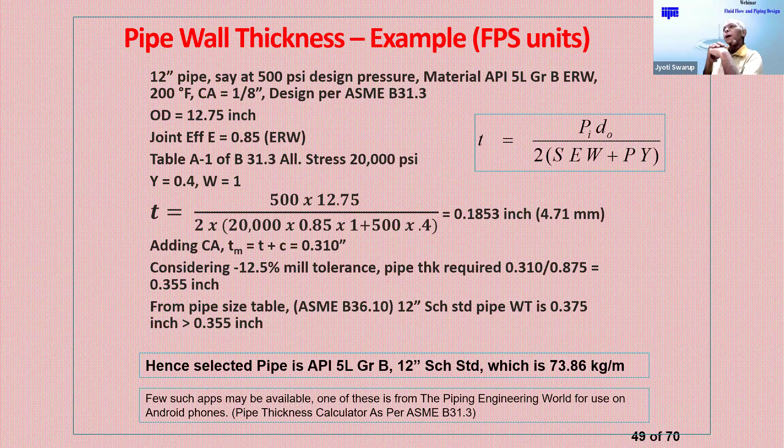Such apps are also available on mobile, and you can use some of these apps for calculation. But understanding the concept behind the thickness calculation is a must before you go with any of the apps on your mobile. I've given the same example here for both CGS units and FPS units, and whichever unit your company works on, you can use these examples as a reference point for your Excel sheet for calculation.

Now, simplified piping flexibility analysis. What is flexibility analysis? If you have a pipe like this, the pipe will thermally expand if the temperature increases, or even if it doesn't, the fluid inside or the atmospheric temperature increases—morning temperature is 3 degrees, noon temperature is 52 degrees. So the pipe will expand, and for absorbing the expansion, you create a loop like this, wherein the thermal expansion is converted into bending stresses in the pipe instead of compressive stresses.

Now, how do we calculate this loop size—what length, what spacing we should have? A very simple formula is given in the piping code 31.3, which does not require software for calculating piping flexibility or stress value. Many of you use complex software like Caesar II or AutoPipe for calculation of piping flexibility, CAEPIPE, etc. But in 90% of the cases, you do not require software. If you understand the concept behind it, you don't need software for calculating thermal stresses in a straight pipe or a simplified piping system.

This formula is extremely handy for calculating the stresses and the expansion loops required for absorbing thermal expansion. The formula is: dy / (L - U)^2 less than or equal to K1. K1 is a parameter of allowable stress divided by the modulus of elasticity. So, D is outside diameter, E is the modulus of elasticity, L is the developed length of piping between anchors, S is the allowable displacement stress, which is 1.25 cold stress plus 0.25 hot stress, and U is the anchor distance, straight line.

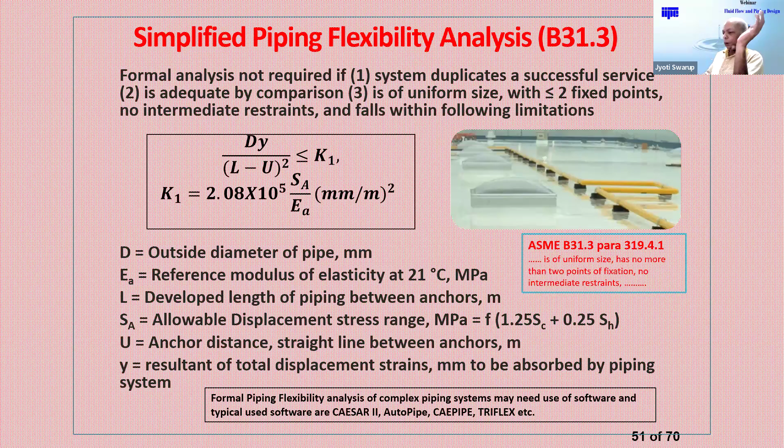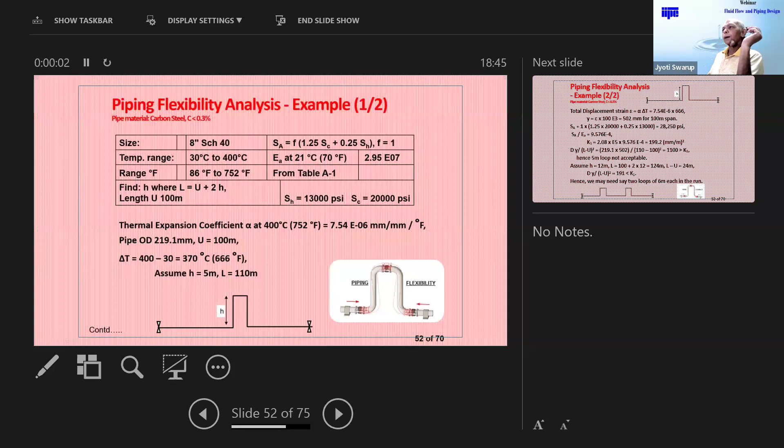You can use this formula for calculation to check whether 5 meters is good enough. The total displacement strain calculated is about 502 millimeters for a 100-meter span. So you can see the pipe will expand by half a meter if there is no expansion loop in the pipe. You calculate this number—5 meters found is more than K1, therefore 5 meter loop is not acceptable. Now we work backwards and find that a loop of 12 meters is what will be required to satisfy the requirement. And 12 meters is very difficult to physically put.

I think it's got reversed here. Just a minute. I think the slides are not coming correctly. Yeah, I think... no, no, no. Okay, yeah, I think this is the right one.

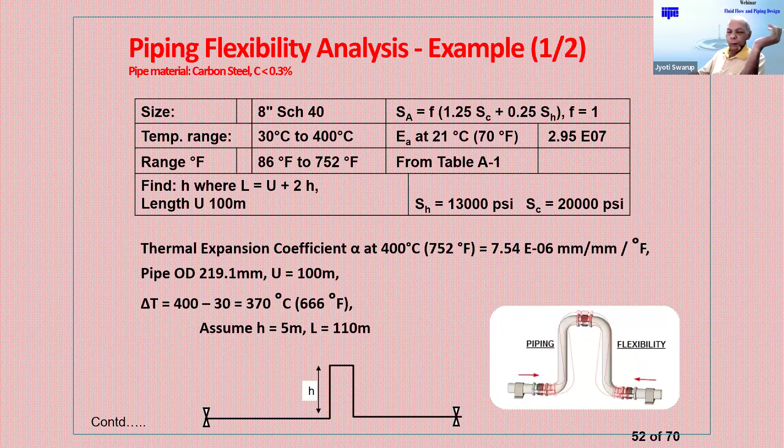As you can see here, you may not need one loop, but you may need two loops, each of 6 meters. So this is how we design the pipe expansion loop, and this is a very simplified calculation which any piping engineer can do himself. He does not have to refer to a code or stress analysis software for sizing it out.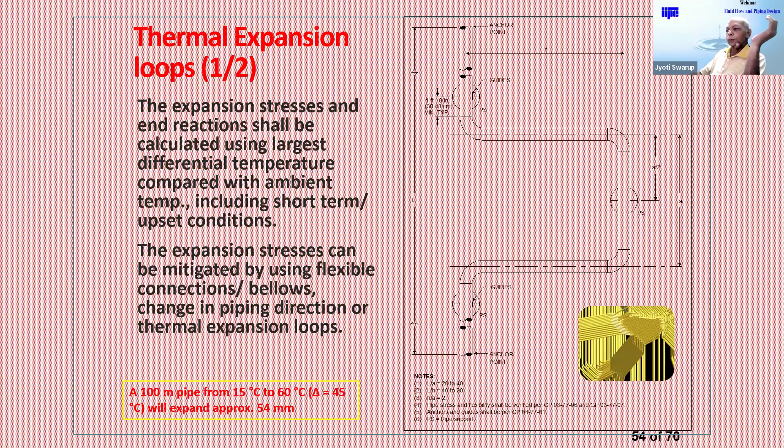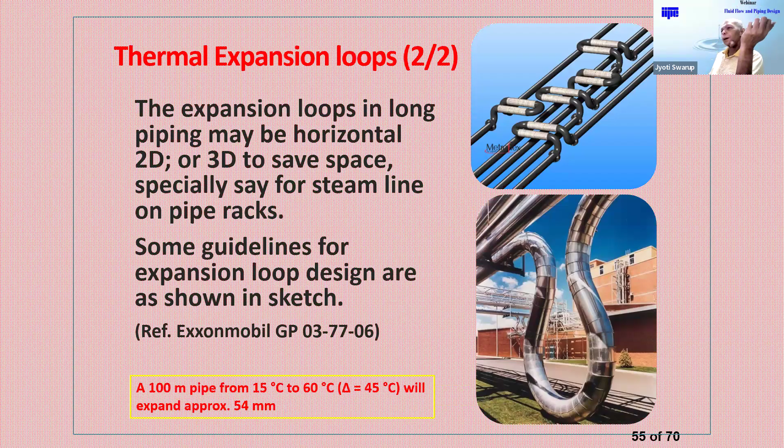Now, piping loops can be various designs. If you see these figures, in an overhead piping system you have a three-dimensional loop. Like steam piping, you always find a loop like this because you don't have space to put a very long expansion loop—space is a criteria. Or the expansion loop can even be in an odd shape, not rectangular as we designed. 3D or 2D loops are very common, and many codes and guidelines are available for what kind of loop can be utilized for our system.

Now, what is a piping class? A piping class is nothing but a set of pipes, fittings, and flanges put into one document, for simplification and ease of use for the piping engineer. Class designations can be A, B, C as in ONGC, or 1, 2, 3 etc. as in Shell, providing applicable codes and material selections for pipe, fittings, flanges, valves, hoses, gaskets, and accessories, and design limits in terms of pressure, temperature, hydro-test pressure, and pipe wall thickness.

So that means for every pipe, we don't have to design a piping system from scratch. We can use these piping classes for a particular pipe. So for any pipe—let's say we have a hydrocarbon pipe for a high pressure system—we can use an ONGC piping class like F1, which is for a 1500 pound flange rating.

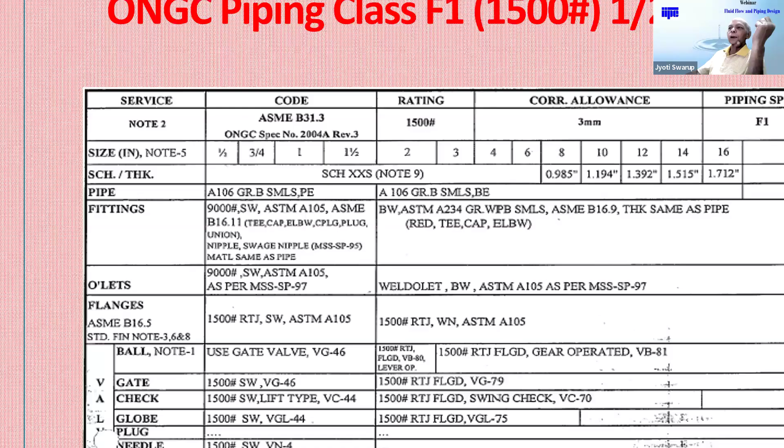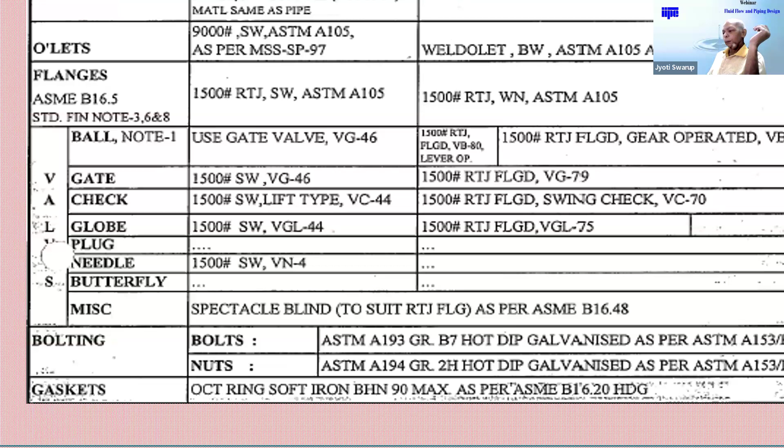It gives the service type, which code is applicable, sizes from half inch to 16 inch, what corrosion allowance to use, what schedule to use, what pipe material grades and fitting grades to use, weld-o-let, flanges, bolting, gaskets, and so on. Then branch details—for example, if you have a tee or a header, what shall be the header size, what shall be the branch size, what thicknesses of pipes to use, and the limitations of the piping class.

So this is how a piping class is defined—these two sheets together make one piping class. Each client has its own set of piping classes; there may be 200 or 300 piping classes for different types of pipes like water application, hydrocarbon, viscous fluids, high temperature fluids, etc. These piping classes are very handy for piping engineers when designing a piping system—he does not have to do calculations for each and every pipe he puts into a process plant.

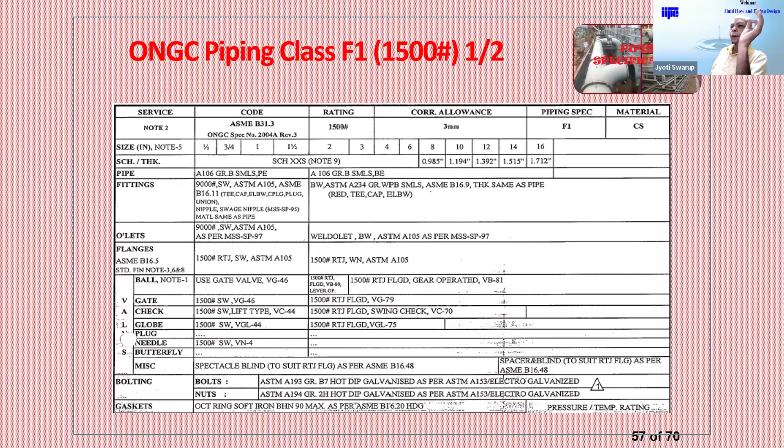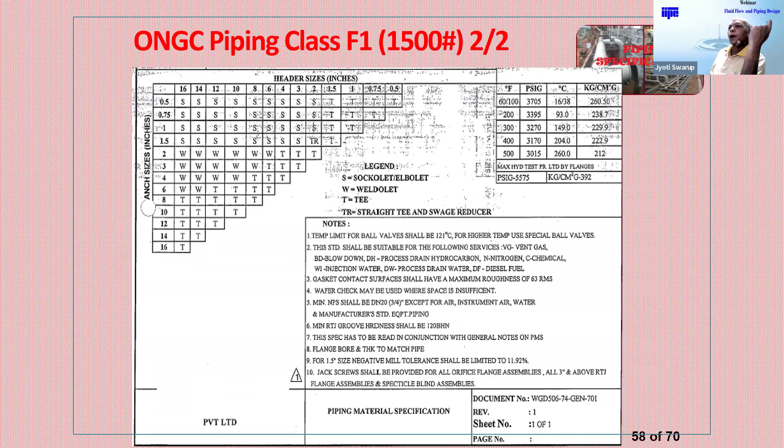Of course, water is very easy—you can have only high pressure and low pressure, and the materials are usually carbon steel. But in any process plant, there can be various different categories of materials, sizes, and ratings utilized, and each will have a piping line design according to codes and standards. I've given a reference here, but looking at any client documents, you can find the piping class detail in the documentation.

Now, another totally different subject we want to cover is piping span calculation. If you have pipe supports—for example, in this diagram, there's a weight in the pipe, which can be the pipe itself, insulation, or fluid in it—and this pipe is supporting that weight. What shall be the span of this pipe? That calculation we need to do when supporting the pipe. For example, what is the spacing between support to support? That calculation is again a very simple calculation based on three factors: bending stress, vertical deflection, and natural frequency.

This third factor is normally not a concern in water piping and such, but it becomes important in critical piping systems, especially hydrocarbon systems driven by reciprocating compressors. Reciprocating compressors operate at low speeds and their frequency may match the natural frequency of the pipe. Therefore, natural frequency also becomes a criteria in pipe span selection.

These formulas are given—very simple formulas available from a book called Roark, Formulas for Stress and Strain. I think many people may have seen it in their engineering studies. The formula is: length or span L equals 8ZSH divided by W, where L is the allowable piping span, Z is the modulus of the pipe section we mentioned earlier, and S is the allowable tensile stress.

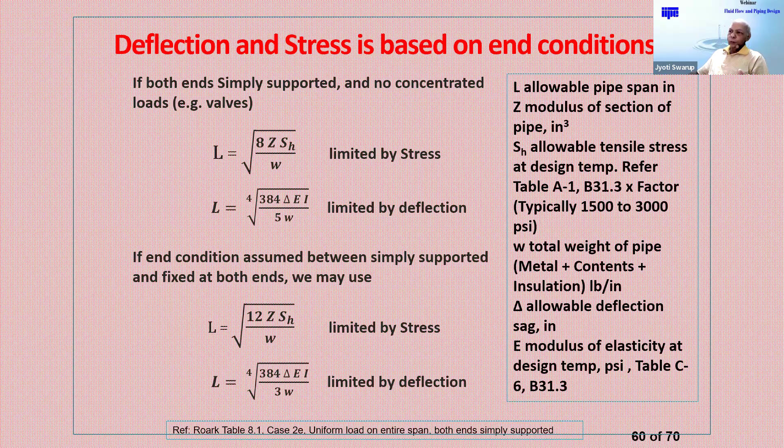For example, we can use 3000 psi, where W is the total weight of pipe, which means metal plus content plus insulation. Delta is the allowable deflection, and E is the modulus of elasticity. So limited by stress, limited by deflection, if end condition assumed between simply supported and fixed end at both ends, then the formula is slightly different than that.

These kinds of formulas can be seen in the code, in the book I have referenced here. Whichever formula is applicable for your case, you can use it for calculating the pipe deflections and stresses, and then work backwards into the span length.

For example, I have given here a 10-inch schedule standard weight pipe, 400 degree F, A106 grade B material, filled with liquid of specific gravity 1.2, insulation 2-inch calcium silicate, maximum deflection allowed 5 by 8.

While deflection is a criteria, if you want to empty the plant, your deflected pipe will not empty. So you have to make sure the deflection is such that you can still empty the pipe and the slope is enough to empty it.

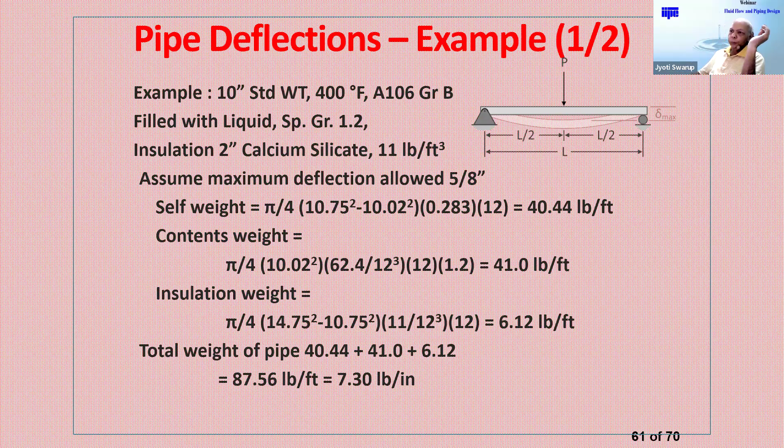So self weight is calculated, content weight is calculated, insulation weight is calculated, total weight is so much per foot. Now allowable stress from the code, say 4000 psi I have taken, section modulus from the tables are calculated, Young's modulus, moment of inertia, and limited by stress is 33 feet, limited by deflection is 34 feet. So you use 33 feet as the maximum span for 10-inch pipes.

This example will help you calculate the pipe spacing depending on which support spacing or support type you have. Now this kind of table is available which you can use directly for support spacing, but understanding the concept behind it is extremely important.

Please do this exercise before you use the table, as standard tables have limitations and should not be used blindly without understanding the concept.

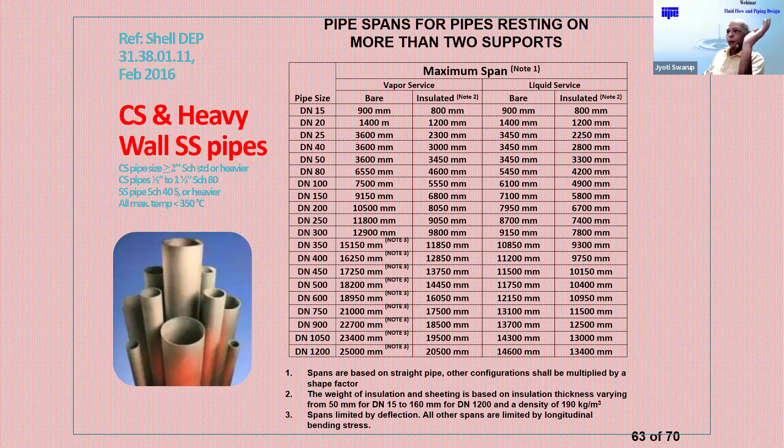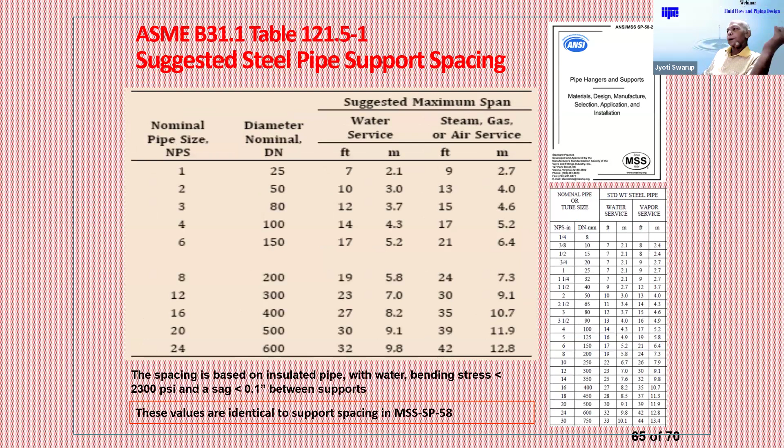Then there is another code called MSS SP, which also gives support spacing. So you can use this kind of table if you understand the concept behind calculating the support spacing, and you can utilize these numbers if you have a standard case. But if you have a slightly different case, then you should avoid using the tables and do the calculations instead.

So I think this covers my presentation for today. Valves can be a separate presentation altogether, covering how exactly we select the type of valve. And these are the list of codes and standards.

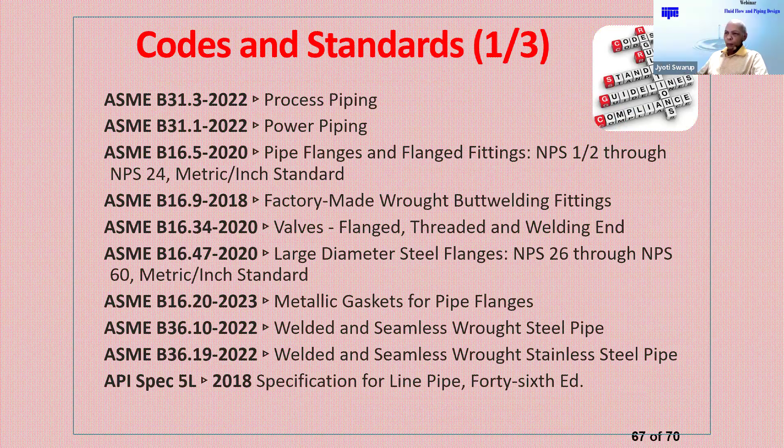I have given here various codes and their latest editions. For an actual case, it's always suggested to use the latest edition. For pipes and accessories codes, this is not only ASME, but also other codes like MSS code or API code for piping inspection, etc., and for valves, the European codes as well.

I have also given a list of Indian codes, some of the codes for piping and materials, for pipe or steel, tubing, etc. But you can look at the publication I have referenced here for the full list of codes and standards applicable to piping and fitting facilities.

So this is the end of my presentation for today.